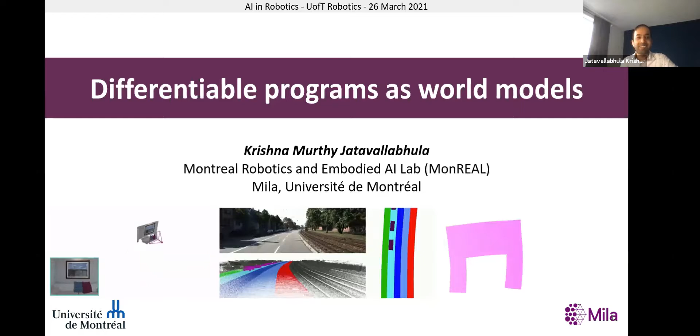Speaking about my work, I broadly worked on 3 themes over the past 6 years. And the approximate area covered by each of these pictures tells you at this moment how excited I am about each of these themes. So this talk is going to be on one of the themes that I am the most excited about, particularly in terms of how can you use differentiable programming to improve a variety of fields like robotics, graphics, and physics.

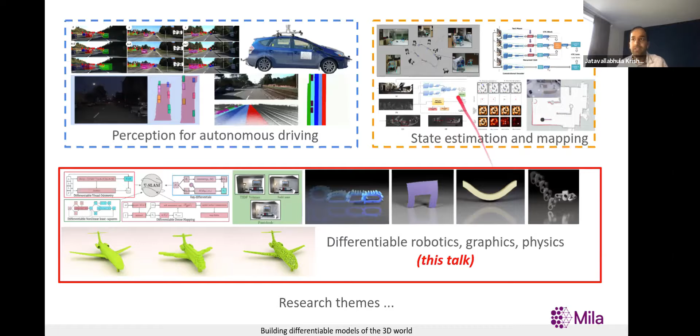One question that I always keep asking myself is that there's been lots of research in robotics over the last 20 years or so. We've developed a nice theory of probabilistic robotics, and we've built perception, planning, and control modules. But over the last few years, with especially the rise of deep learning, we're now at a point where we're trying to reconcile what's the place for all of these classical techniques in the current stack. Although I won't go into all of the motivations and rationale behind why I take a particular approach, just given the nature of this talk.

Today I'm going to be talking about one key idea and then 2 themes that are offshoots of this key idea. So the basic idea of today's talk is going to be that you have all of these components of a typical robotic stack. So you have perception modules that take in perception inputs from a robot's sensors and then convert them into state estimates. And then you have a planner which produces plans, and then a controller that executes those plans at a metric level, in the configuration space that a robot is operating in. And you also have the environment that's outside the robotic system.

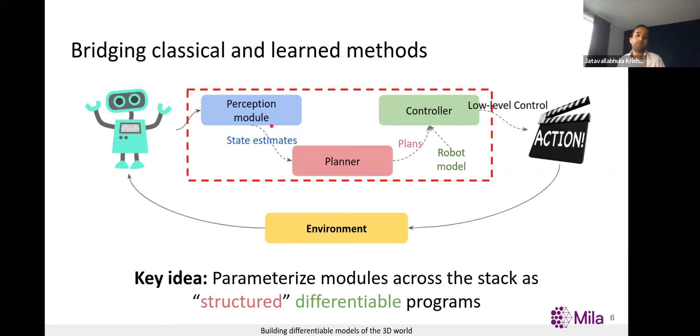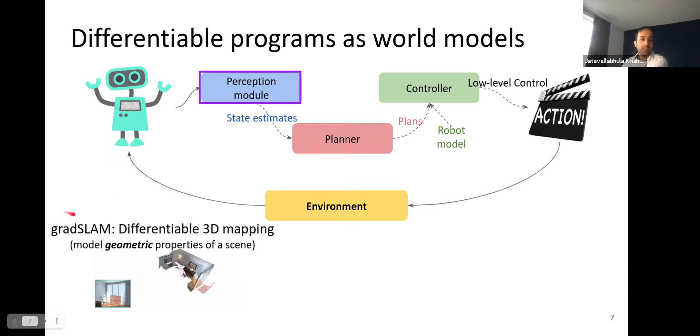We don't need to throw away all of the theory that we've developed, but rather use that and reparameterize them into structured and differentiable programs. So you can still do learning pretty much the same way you're doing using the tools that you use today, and get much better performance, interpretability, and perhaps generalization. So I'm going to be particularly talking about 2 efforts. The first of these is gradSLAM, which is a differentiable dense SLAM system. And the second effort is gradSim, which is a differentiable simulation platform.

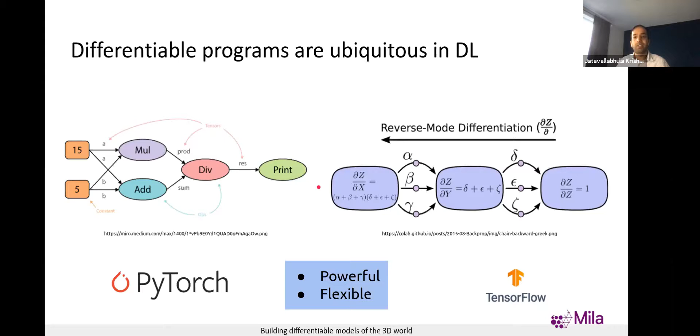But before I get into this, one segue into differentiable programming. So I assume most of you are familiar with the notion of differentiable programming, but what a differentiable program does is it specifies a function that is differentiable. So you have a forward program that takes in inputs and constructs a differentiable function. And then you have a gradient program, or a backward program as it's typically called, which evaluates the derivatives of the function with respect to parameters, either internal to the function or input to the function. So typically this just involves a repeated application of the chain rule, and you probably use this quite often. All of these deep learning frameworks are under the hood automatic differentiation wrappers.

So with that bit of background, we'll now look at a few applications of differentiable programming. Like one such work that I did about 2 years ago. It's called gradSLAM, and this was a paper at ICRA in collaboration with Ganesh and Liam.

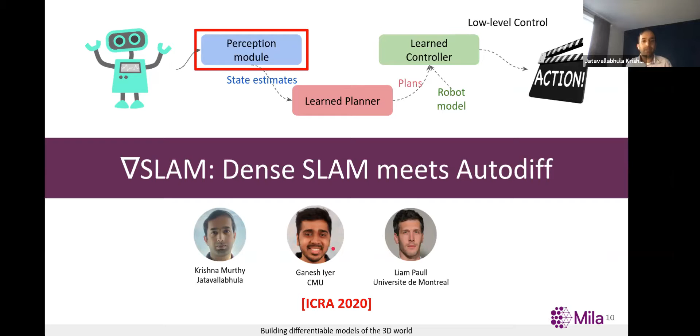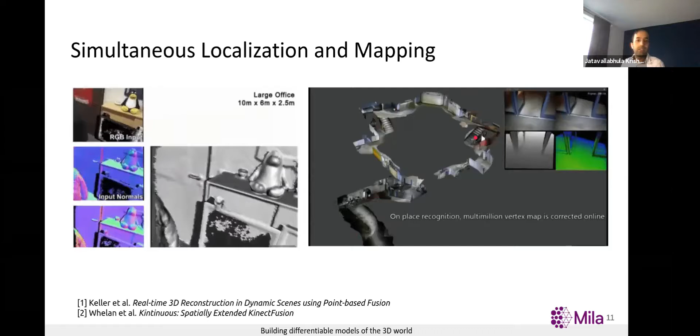And since the deep learning boom, everyone has been even more excited about SLAM. SLAM has been one of the core research problems in robotics for the last 20 to 30 years. And with deep learning, people naturally wanted to do more deep learning with SLAM, but there's quite a few issues. SLAM is technically a sequential process, and typical SLAM systems are more heavy on the engineering side as opposed to the science. There's a lot of science that went into designing the theory behind SLAM.

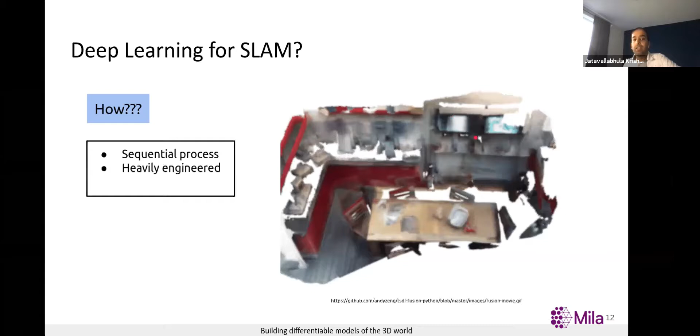But over the last 4 or 5 years, if you look at popular SLAM systems, what they predominantly change is how they engineer the concepts that have already been established rather than trying to do something fundamentally different. So you still rely on factor graph based optimization, and you still probably rely on feature extraction or visual inertial fusion. All you change is how all of these interplay.

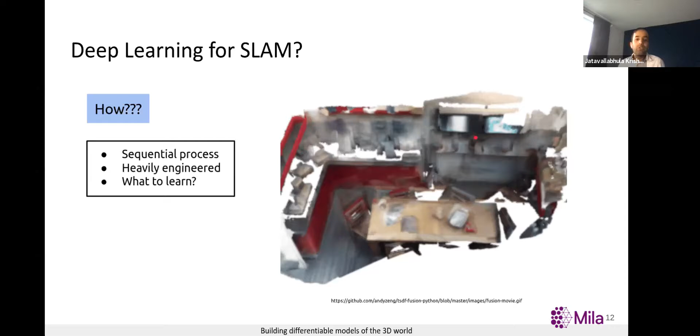And there's also a question of, since SLAM is a very big pipeline with several moving parts, what parts of this system would you learn? And what parts would you rather just have specified? Or would you rather just learn everything end to end, throw a neural net at the entire problem, and expect it to produce maps and trajectories?

So what we did is we take a functional view of SLAM. If you just think about SLAM as a function, in particular dense RGB-D SLAM, you take RGB and depth images as input, you run them through a SLAM system, and you get a trajectory of the camera and a map of the environment. So a functional view of SLAM would be you take sensor data S and you produce a state estimate M.

So our key idea was, can we somehow make this mapping differentiable? What that means is, if you were to perturb the sensor inputs by some infinitesimal delta S, so this is definitely not infinitesimal, but this is just for illustration, your trajectory and map estimate, your state estimate, is going to essentially change by the gradient of SLAM. So if this mapping were differentiable, you can reconcile the changes in your 3D map with the changes in your sensor inputs. You basically want to specify how much the output of a SLAM system changes with respect to changes in the inputs.

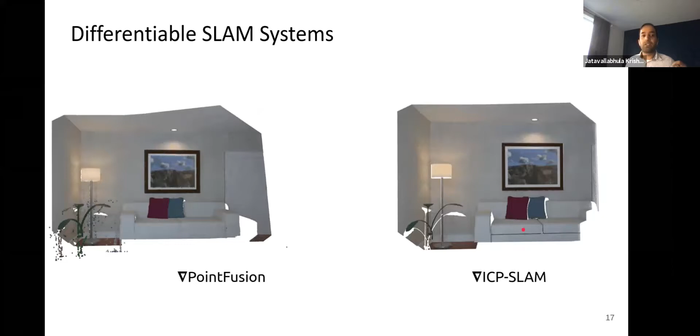What's good about these SLAM systems is the accuracy of the reconstructed map. That doesn't seem to degrade. But the added advantage here is that, as opposed to non-differentiable SLAM systems, you get differentiability for free. And I'm going to talk about how that's helpful.

So one very interesting aspect is that when things are differentiable, you can actually compute gradients through the system to get rates of change, or also compute sensitivity to a particular parameter. In this particular case, we take an image as input, an RGBD sequence as such, and we pass that through gradSLAM, and we get a noisy reconstruction.

And the noisy reconstruction is partly because the depth sensor has noise. But we also have a clean version of that dataset because it's all in simulation for now. I'll show a couple of real results later. So we take a cleaned up version of the same set of images and pass them through a SLAM system and obtain a reconstruction. And this looks much cleaner. And what we'd like to do is compare both of these.

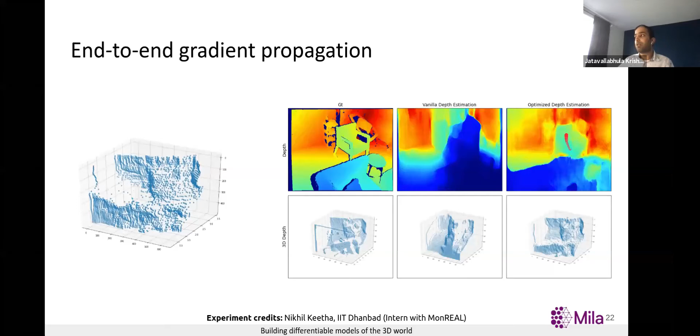But as you optimize, you backprop through gradSLAM and use the gradients with respect to the depth image to compute the updates to the initial guess, and you get closer and closer to how the scene might have really looked. And if you run this for a while longer, you can get really accurate estimates.

So in this case, we start off with both the RGB and depth being noisy. The RGB image is noise and the depth image is just a constant across all pixels. But when you pass it through gradSLAM and backprop and recompute updates to the RGB and the depth, you get quite close. There are still a few finer features that are missing, but you get a very good fix on all of these.

From noise, you're able to carve out all of these details. So just before I get into the next part of this talk, the takeaways here are, with gradSLAM, the cool result for us was we could take the gradients with respect to any error defined in 3D space and propagate them all the way back to pixel space. So you can do learning in pixel space. In this case, we've done learning of depth estimation or depth refinement. But you can also imagine learning semantics that are consistent across a video sequence and things like that.

There's also a few drawbacks here. The primary drawback is that gradSLAM would require 3D supervision, because the output of a SLAM system, if you think about it, is a 3D map and a 3D trajectory of the camera. And defining an error function over that 3D representation means you would actually need access to 3D tracking, or you need ground truth in 3D to be able to define that. So it's kind of expensive to gather this kind of supervision.

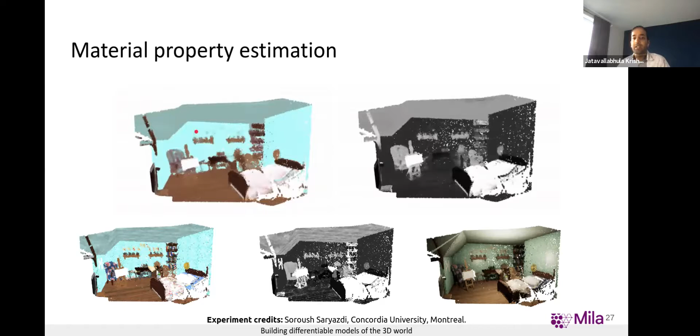So that's the first part that I want to talk about. And before I get into the second part, I'm happy to take any questions. And also if during the talk there's any questions, I'm happy to pause and answer the questions right there.

Cool. So I have a question. Well, actually multiple questions. So I really like the differentiable nonlinear optimization layer. If I remember correctly, you guys did the Levenberg-Marquardt step. You put it in the computation graph as a fixed step. So I'm wondering, in order to make this scalable, do you actually need to reconstruct the entire map, or do you need to focus on some key aspects of the map? Either key points or regions of interest, but perhaps not the entire thing.

Yeah, that's a good point. So our motivation behind gradSLAM was that you have sparse key point based SLAM systems, and that's one end of the spectrum. They just produce very, very sparse maps. The other end of the spectrum is dense SLAM systems, which produce very dense maps. And most of the research in SLAM has centered around what should be the right representation for a map. Should you use point clouds, surfels, TSDF-based voxels, and all sorts of fancy representations. So ideally, having this differentiable SLAM system, our eventual goal is to learn representations that are best suited for a task.

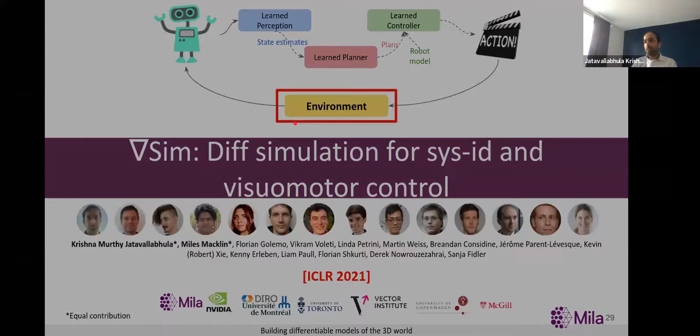And there have been a few attempts ranging from just throwing a neural net at it to doing reinforcement learning. But of late, approaches that have been more successful are ones that explicitly bring some form of physical reasoning into play. So people have done it by bringing in non-differentiable physics engines and performing gradient estimations for them. That's what you typically do in reinforcement learning. You have all these simulators like MuJoCo, PyBullet, and so on.

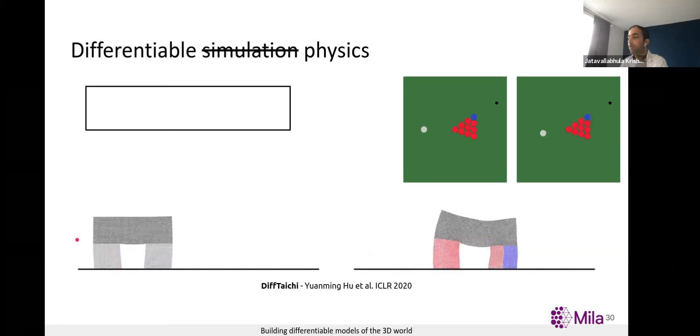But more and more over the years, people have been realizing that if these simulations are differentiable, which is if you can compute the gradients of the outputs of the simulator with respect to the inputs as well as the parameters, there's more you can do. So this is one example from last year, called DiffTaichi, where they implement a wide variety of physical simulations, both for parameter estimation and control style tasks. But one disadvantage in all of these systems is these systems need supervision in the state space.

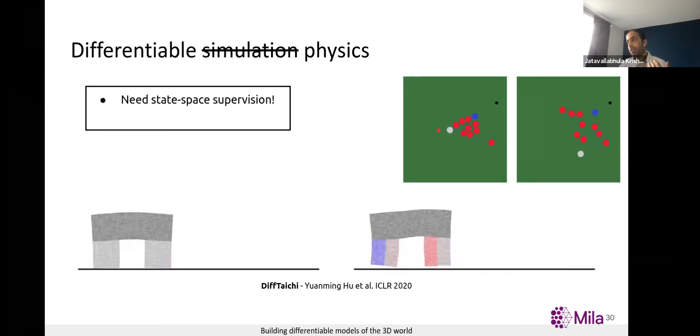So if you think about what the output of a simulator is, a simulator takes in some initial configuration, such as the config of this billiards table or like this robot here, and produces output states. And by states, it could just be positions and velocities, or it could be a lot of other aspects. So for the soft robot here, you might have a per grid cell state.

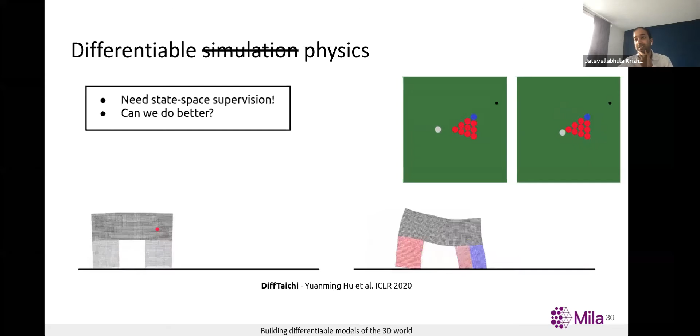This soft robot here is actually a collection of a lot of components, and each component might be in a different state. So if you want to specify any kind of objective at the output of the simulation, it must be in the state space of the simulator. And the question we were asking is, can we somehow do better? This kind of supervision is very hard to gather, especially if you think of systems like these deformable objects or more chaotic systems like cloth. It's almost kind of impossible to track each and every point on a cloth.

So our idea basically was, if you think about existing approaches to differentiable physics-based reasoning, they take in a scene description and pass it through a physics engine that's differentiable, and it produces states. And it just keeps running on and on. And over n steps, it produces states, and you have supervision defined either here or at multiple spots along, and you can backprop all the way to figure out how your scene description must change in order to achieve a target specification.

And what we do differently now is we take on a view of simulation as being both physics plus rendering. So as a human, when you look at the simulator, you kind of want to see how the object configurations change. If I just tell you the positions of each object and print out a mess of numbers, that might not make a lot of sense to you. So because of that, a lot of simulators have some way to visualize outputs. And we wanted to tap onto this because each simulator has a built-in visualizer. Can we use this rendering engine and also differentiate through that?

And what that will enable us is, if you think of the forward process, you're given a scene description and the physics engine keeps running and produces states at each time step. And at time steps of your choosing, you can just render those states to form an image. And that's how you get all of these videos of simulated objects and so on. And crucially, the rate at which the physics and rendering engines run need not be identical. You can always think about rendering much slower than the physics engine updates.

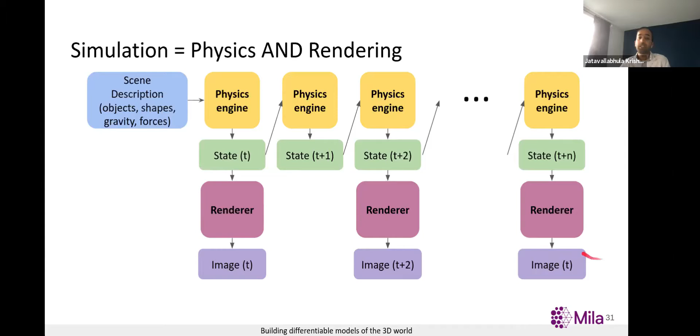But our idea is, if you now think of this physics engine augmented with a renderer, the output of the renderer is an image. So you can essentially provide supervision in image space and backprop all the way through to the scene description. So that was our initial goal for this project, where other differentiable physics-based approaches would require state-based supervision. We wouldn't need to track each joint position and velocity. Rather, you give a target video sequence, or a target image in many cases that you'll see later.

And the kind of problems we're interested in is you're given a video sequence. We're interested in two kinds of problems. There's a system identification problem where you're given a video sequence and you want to estimate all of the physical properties of an object. And there's also a visuomotor control kind of task that we're interested in, which I'll get to soon.

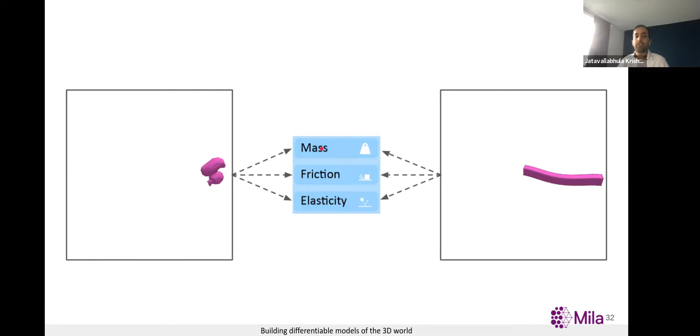So again, to recap, we have this system where we take in an object specification in terms of its mass, friction, elasticity, and the external forces acting on the object. And you roll them out through a physics engine, generate states, and render them out to generate a predicted video sequence. And this predicted video sequence is compared with a ground truth video sequence.

And in most cases, we do a frame by frame mean squared error over each pixel. So we just take these images across each time step, we stack them together, and we do an L2 loss over them. And since the simulator is differentiable, you can backprop these gradients all the way through to the physical properties. And I'll show you a few visualizations of how smooth this optimization process might be.

So again, the key distinction between approaches that would use only a differentiable physics engine is they would only produce states, and you would need to somehow provide supervision here, or you would need to perform some form of gradient estimation through this other part.

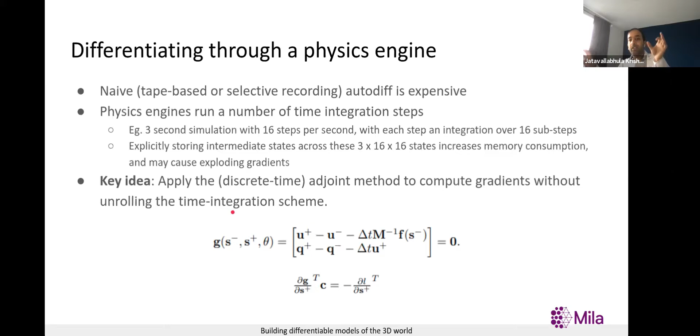If you differentiate through the system, you'll end up with a set of equations of this form. We provide one concrete example in our paper, towards the appendix, and I'd encourage you to look there for a concrete system, but you can kind of see why this will not require you to unroll all of these, because the gradient with respect to your previous states can be computed without having to access all of the intermediate variables. You only rely on the inputs and the outputs.

So using such an implicit, it's not necessarily an implicit differentiation scheme. We apply the implicit function theorem, but a more technically correct way to call that would be the adjoint method. We just apply the discrete time adjoint method to implement backpropagation through our physics engine.

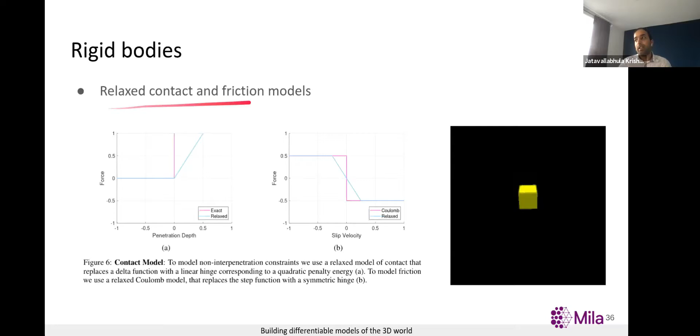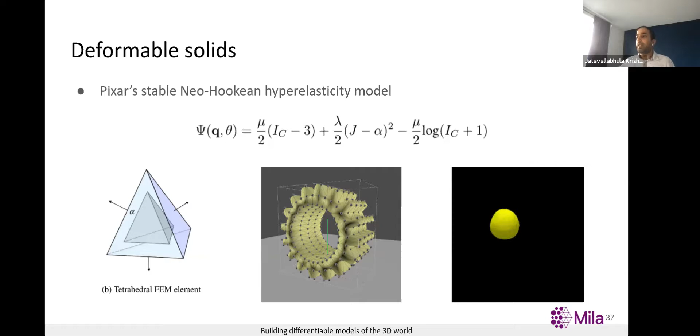And a degenerate case of this tetrahedron is when the volume is 0. You can just think of it as a triangle, and you can still sort of bend the triangle or expand or contract the triangle and so on. This kind of a parametrization is useful to simulate cloth.

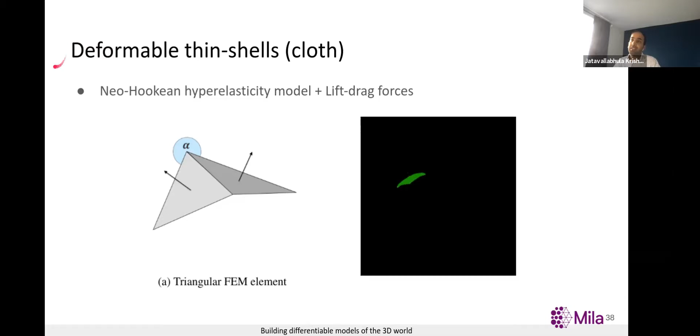So that was about the physics engine and just a flavor of a few systems that we could support. And over the last, I'd say beginning 2015, the computer vision community has become interested in differentiable rendering. And what differentiable rendering means is you have a rendering process. So rendering is basically taking in a scene specification, a 3D scene specification.

And you kind of pass this through a renderer to render an image. That's how you see a lot of graphics. But this renderer is differentiable in that it allows passing gradients back through, and you can basically update your inputs to the renderer as well as parameters that you have within the renderer.

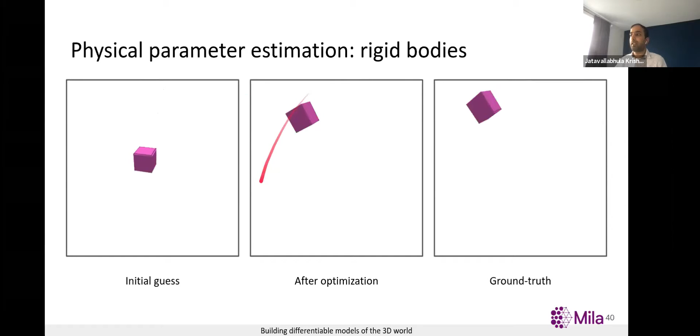So one example that you see here is rigid bodies. We have a cube that's much heavier than it's supposed to be. So it falls, but then doesn't bounce back. But after about 50 to 100 iterations of optimization, I should have put a number of iterations here, but yeah, after things converge, you end up with the true mass parameter, and then it behaves as it's expected to.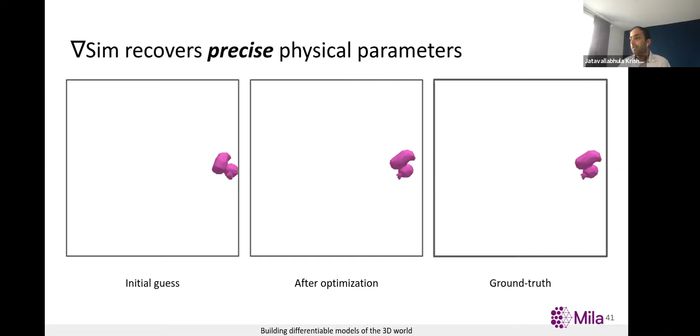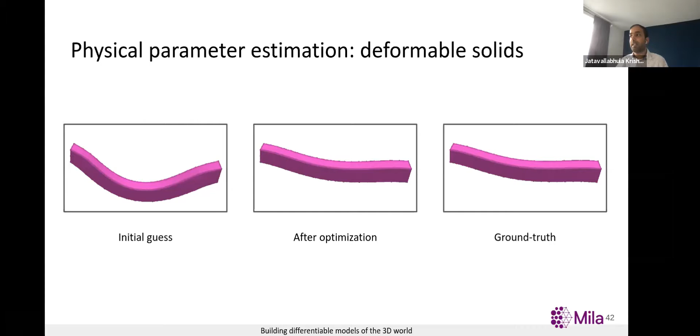And we also do something very similar for deformable solids. You want to estimate the elasticity parameters so that you get the right kind of bending behavior as you see in the ground truth. So this is a very poor initial guess, and then after optimization, you get very close.

We also do this for incompressible fluids, or here it's smoke, where there's a lot of smoke particles resting on the ground. And I just grabbed this pattern off Google Images, but I had to tailor it, like run an off-the-shelf binarization algorithm.

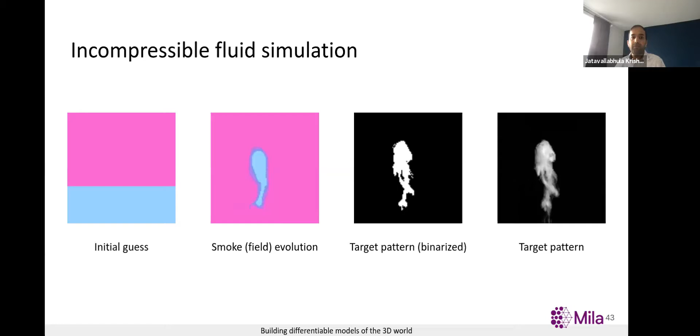And the goal for the smoke field evolution is, at the end of 5 seconds of simulation time, it's either 3 or 5 seconds, I'm kind of hazy on the details, but you need to get this target pattern that you see in the third column. And we get quite close on getting the coarse pattern right.

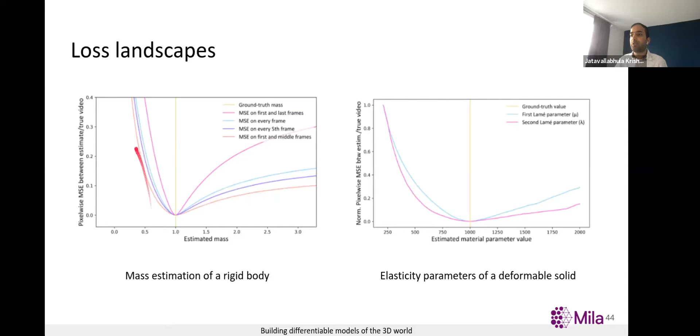So we went back and looked into, can we explain our performance by looking at the loss landscape through the simulator? And we found that, for example, for mass estimation, for an object that has ground truth mass of 1, the loss landscape through a simulator looks much smoother when compared to when we use a non-differentiable simulator but run gradient estimation through it. Here we use PyBullet, which has a much smaller convergence basin.

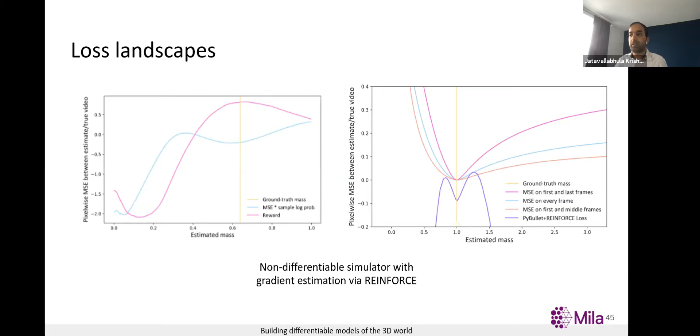There's a few tables, but since these are in the paper, I'll probably skip to the more interesting results. And just for context, how much more time do I have? I guess I'm nearly out of time. Probably about five more minutes. Yeah, I think let's try to wrap it up in 5 minutes. Yep. Yeah, that's pretty much all I need.

So thanks. So in this case, it's a tetrahedral mesh model that I showed you. You can actuate this object by expanding and contracting each tetrahedron. So we train a 2-layer neural net that's predicting the actuation parameters for each tetrahedron, between a range of 0.7 and 1.3. So each tetrahedron is allowed to contract or expand by 30% of its initial volume.

And you need to figure out at each time step how much to expand or contract. That's the policy the neural network is learning. And after optimization, it gets quite close to ground truth. So the gear learns how to roll.

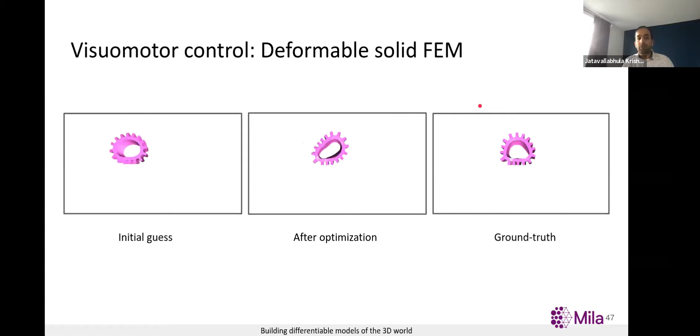And the key thing here is we only use one image as a supervisory signal. So we take this image at the end of simulation and we compare it with the ground truth image. And we just take an L2 difference and backprop it all the way through the simulator and then figure out how the gear must move.

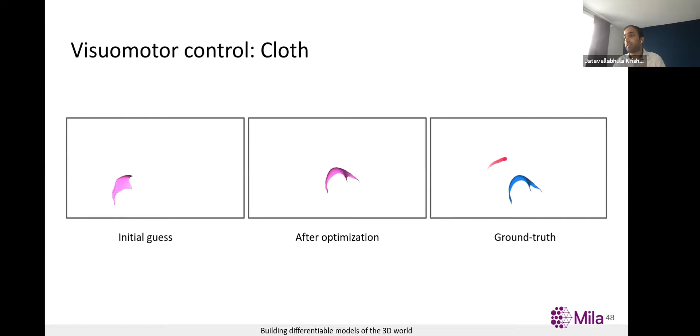And we do a similar thing for cloth, where we optimize the initial velocity vector through which we throw a cloth so that it approximates this ground truth. One other interesting example is a 2D walker. So instead of tetrahedrons, it's now just triangles. And this walker has been initialized with a random policy. So it kind of does nothing interesting in the beginning.

There's a bit more that we did in terms of analysis, but in favor of time, I'll just end with a few take-home messages. With gradSim, you can get accurate estimates of physical parameters from video by not requiring state space supervision. But there's still a caveat here. Your modeling assumptions need to be somehow correct.

And let's say your model of friction, or when I say model, like your equations of friction or contact, when they're incorrect or they're far off from what's happening out in the target video, you kind of have this gap, which causes a drop in performance. So there's still scope to improve things within the system. That's pretty much my take-home messages.

But just in summary, I guess we saw 2 kind of differentiable models or programs that can be useful, one for 3D reconstruction and the other for visuomotor control as well as system identification. And we also have seen a few recurring downsides with differentiability. And there's clearly a lot of work that needs to be done in overcoming some of these downsides of differentiable models. And perhaps that's where model-free approaches can kick in.

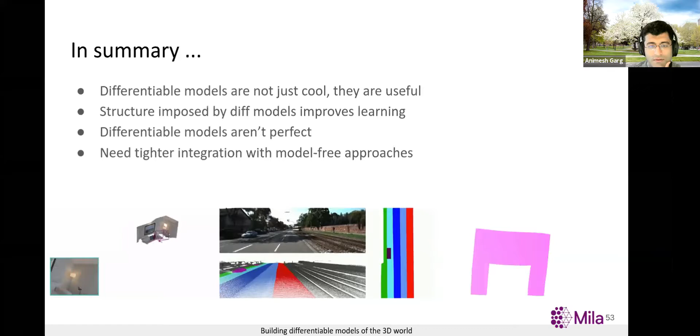I have a question. Yes, go ahead, Chris. So Krishna, when you were describing the loss landscape with respect to the estimated state parameters, could you give some intuition? I'm a little blurry on the math here. Could you give some intuition on why gradient estimation through a non-differentiable renderer is non-convex?

Sure. So when we say gradient estimation through a non-differentiable simulator, we kind of take the images rendered by PyBullet as the reference point. So we try to align all of our parameters, like the camera parameters and the object colors, textures, lights, and so on, so that we have a perfect match between what PyBullet does and what we do.

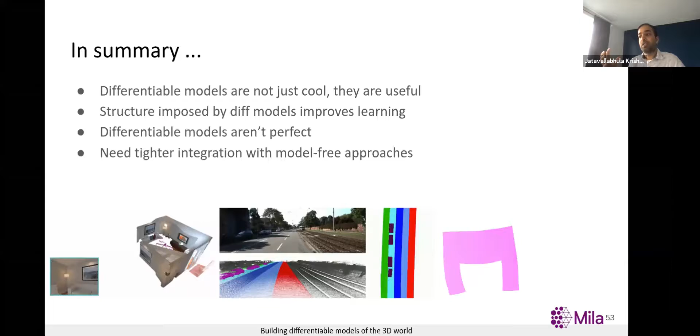But there's a lot going on in terms of the renderer, and PyBullet has a slightly different physics engine as well. So it has slightly different contact models. That causes a change in the dynamics. And the renderer that's used by PyBullet is basically OpenGL based. So what you typically see in differentiable renderers is that the renders are quite smooth, which means very sharp details on the edges are blurred to improve gradient flow through those regions. Because an edge is a discontinuity, differentiable renderers kind of soften these edges.

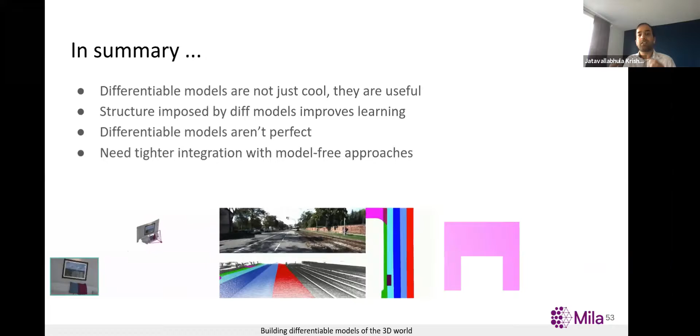But PyBullet has no reason to do that. So all of these things make gradients through a non-differentiable simulator slightly weird. It's just because the entire process is not differentiable. In trying to make, let's say, a renderer differentiable, you make a few approximations that reduce the number of discontinuities, and similarly in the physics engine. Okay, that makes sense. Thanks, Krishna.